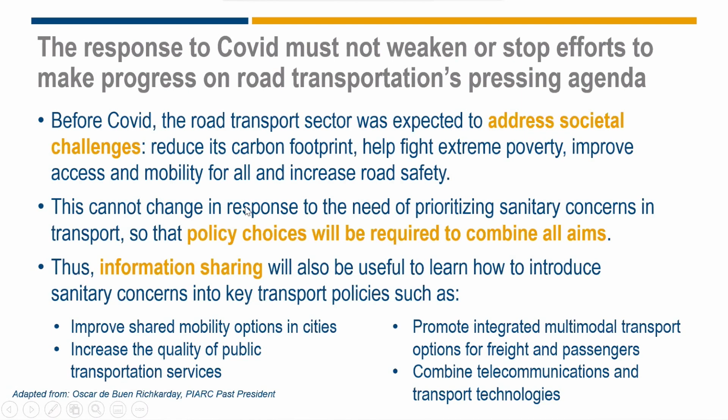So we need to combine all these aims. And for that, there's one way that we can help at PIARC and with Asociación Argentina de Carreteras, through information sharing, so that you can learn in Argentina what we are doing in many other countries, and vice versa. We can learn what you are doing in Argentina and learn from your ideas and your best practice.

And we have two very important conferences, and I guess the first one will be very important for you. The 9th SURF Conference, SURF 2022, which will take place in Italy, in Milano, in September 2022, 1 year from now, and hopefully face-to-face.

So Argentina and PIARC, we have a very long history. Argentina was one of the very first countries to join the association in 1911. We have a vice president of the association who is from Argentina, and we have several key people who are secretaries of our committees, Lodi, Mariano Barone, and Daniel Russomano, of course, and many experts from your country.

So thank you very much from the bottom of my heart for your involvement in the activities, and I hope that in Argentina you find that really useful. And I will remember the executive committee meeting that we organized in 2019, that you organized in Argentina, in Buenos Aires in 2019. Really good memories for everyone.

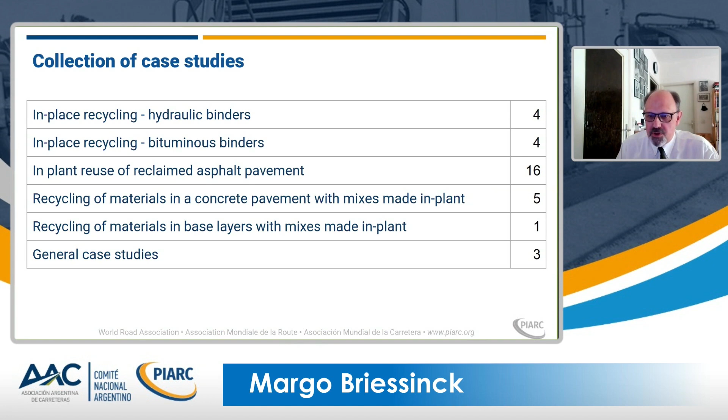So here we have the same layout, let's say. We have, again, the different chapters about in-place recycling and in-plant recycling, again, using either hydraulic binders or bituminous binders. In the right-hand column, you see the number of case studies for each chapter. It's probably not surprising that asphalt pavement is at the top, because it's, of course, a material which has been used for several decades now. So there's a lot of information there about reusing reclaimed asphalt pavement in asphalt layers.

There's also at the bottom a general chapter with 3 case studies. And in that chapter, you will find some of the cases which don't really fit into those other chapters. So in total, 33 case studies, which you can read in the collection after it has been published. So that's what I wanted to say to you today.

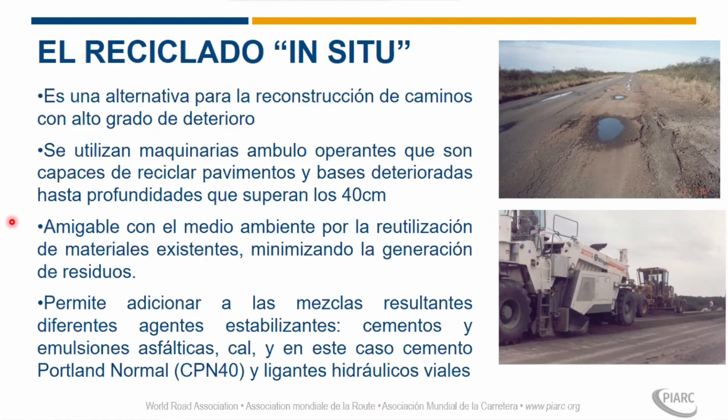In-place recycling is an alternative for the reconstruction of our roads with great deterioration. In general, we use self-propelled machines that can recycle pavements and deteriorated bases over 40 centimeters. It is an environmentally friendly technique with the reuse of existing materials, and what we try to do is to minimize waste generation. We can also add to the resulting mixes different stabilizing agents such as cement or asphalt emulsion. So we have, in this case, used Portland cement or specific hydraulic binders.

Which are the opportunities to recycle? It is important to recycle when the structural capacity of the pavement is not adequate for the current and future traffic, when it is necessary to do a quick recovery or reclaiming of the use of the road, and when the existing pavement condition requires deep patching over 15 to 20% of the surface. So it's a profitable technique. So this is the in-place recycling technique.

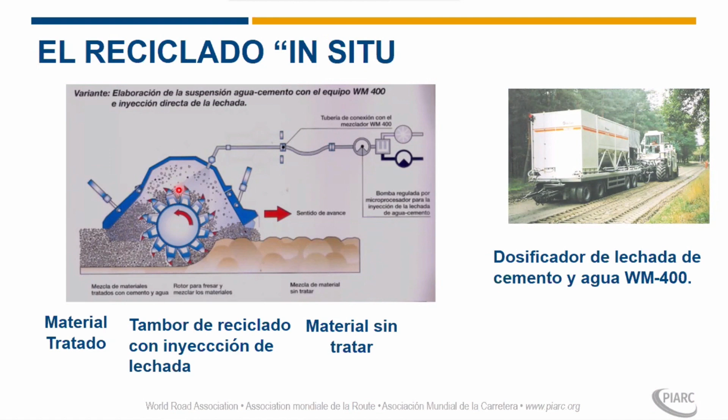We put the material in the front of the machine with recycling drums and moisturizing within the recycling. We have water tanks that go at the front of the machine, and then we can also use a technique by which, instead of moisturizing, we use cement slurry within the drum, and we place the mix there, to be distributed and compacted at the back of the machine.

So factors affecting design and construction: some of them are the immediate commissioning of the rehabilitated area, if it's not possible to use alternative roads; sometimes there's no possibility to use any other alternative roads. Another factor is the need to have a quick recovery of the structural capacity in terms of the structural number required by the road, and also mitigate the environmental impact by minimizing the generation of noise, dust, or waste when working in urban and semi-urban areas.

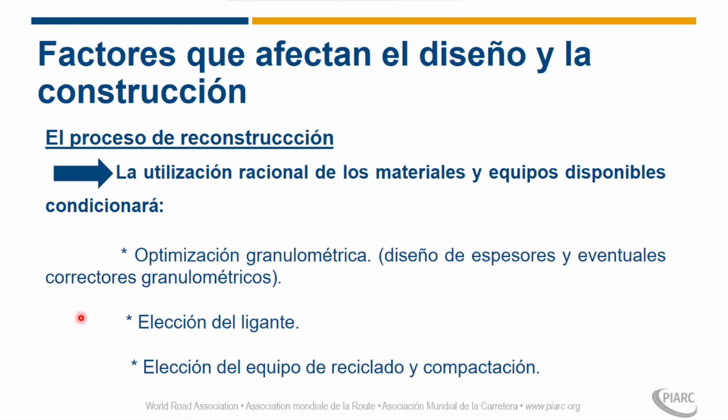As to the reconstruction process, what is important is the rational use of materials and available equipment. This rational use will condition the granulometric optimization. This means that we must design thickness and eventual granulometric correctors with new materials. This is not advisable from the economic or environmental point of view. Then we need to choose the binder. And finally, we need to choose which is going to be the recycling and compacting machine or equipment.

So what we are going to present here is some of the lab studies that were used for this case study. First of all, we show in this table to the left, in the first column, the existing structure and the actual pavement. It had an asphalt overlay over a black base, then a calcareous base, a calcareous subbase. This was a base of selected soils, and finally we had the common soil subgrade. To the right, we can see some of the situations found there.

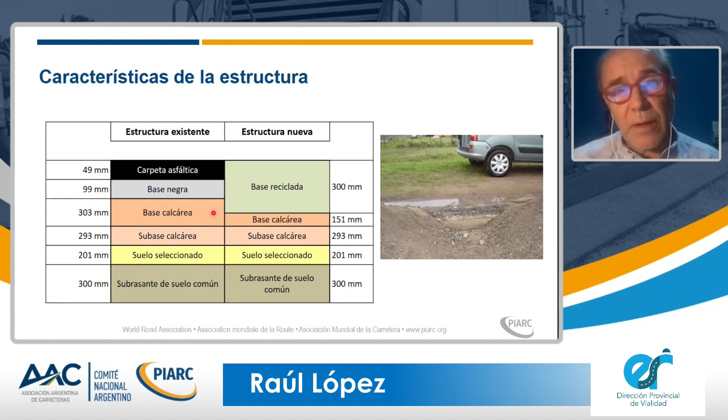And we did a study to assess the depth to be recycled, and the recycled depth was 30 centimeters and included the asphalt base, the black base, and the calcareous base. And why did we choose that depth? This was related with what Engineer Bolla said about granulometric use.

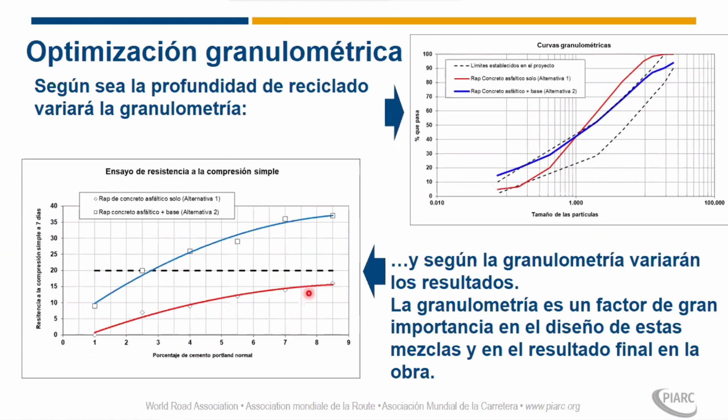On the graph to the bottom left, we can see resilience at 7 days obtained with the two granulometric settings, changing the percentages. Here we have the first test with normal Portland cement, and if we could not meet the granulometric parameters, even with high cement percentage, we could not get to those numbers.

Once we selected the granulometric setting, we decided to work on the one hand by using normal Portland cement according to the Argentine cement standard, which is IRAM 50,000. And the other options were road hydraulic binders that were tailor-made to be used with the RAP, with the reclaimed pavement. And these components are regulated by the European standard 13282, parts 1 and 2.

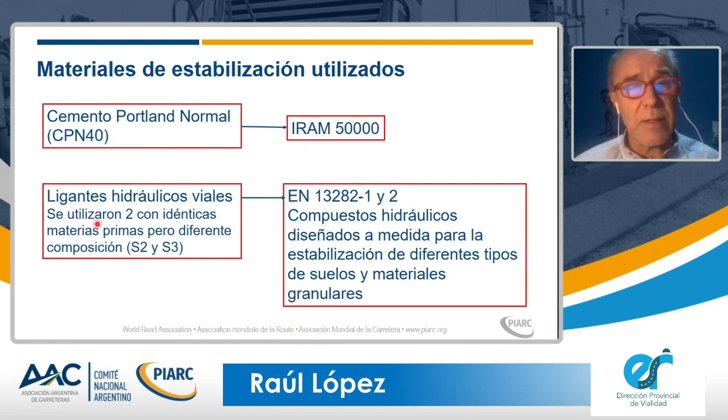In this case, we used two road binders that had the same raw materials but in different proportions in order to obtain different behaviors. Binders used in this job are formulated from active hydraulic components, and they will cement the recycled mix. And the properties we are looking for here, compared to a cement, is to reduce the initial reactivity in order to obtain longer available working times, to develop long-term strength, and to have good volumetric stability. And something that is important nowadays is that they have a lower carbon footprint compared to cement.

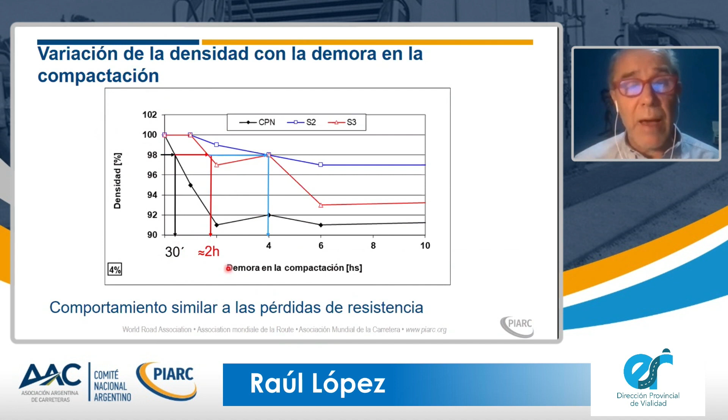Another analysis conducted was considering the open time definition. That is the time you have available for working while the drop in density is just 2%. It means to go from 100% to 98% of density. So with cement, we had an open time of only 30 minutes. And with the binders, we can get up to 2 or 4 hours, depending on the composition of the material. So this was also seen later on in terms of strength.

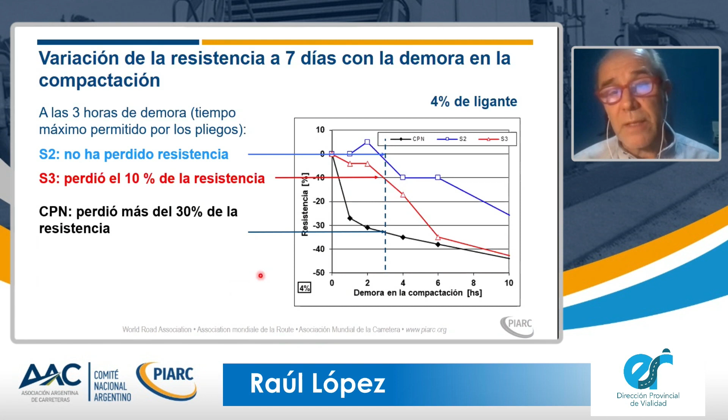But we also were able to see that as we increased the percentage of binder, the percentage drop in strength was higher. So in order to define the type and percentage of binder to be used in stabilization, it is convenient to do lab tests simulating the estimated delays in the work between the mixing of the materials and compacting.

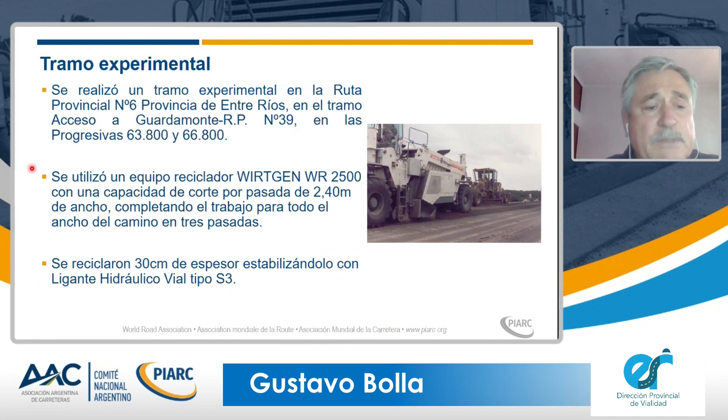Gustavo? So finally, we will present a field study done in the province of Entre Rios on provincial route number 6. It's a stretch of 3 kilometers on the route in the province of Entre Rios. We used WR 2500 equipment, and we used 3 passes to complete the job. We recycled 30 centimeters of thickness, with stabilization with S3 binder. We projected minimum compression strengths at 7 days of 2.0 MPa by using an S3 binder at 3.5% of dry mix weight, compacted at maximum density.

Here we don't have the possibility of alternative roads, so we opened the road once again at 24 hours, just doing irrigation. We did priming with EM1 emulsion, reinforced with crushing sand. Then at 9 months, we did a 5 centimeter layer. At 13, a second 5 centimeter layer, and at 40 months, we conducted the first reinforcement with another 5 centimeter overlay, and at 6 years, a 5 centimeter asphalt overlay. This alternative was defined taking into account the economic conditions at the time.

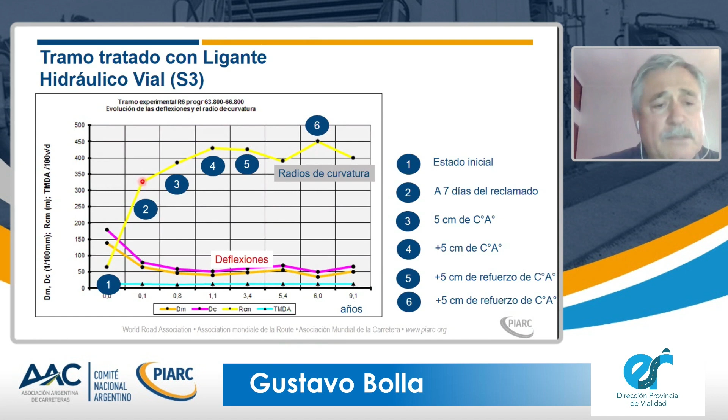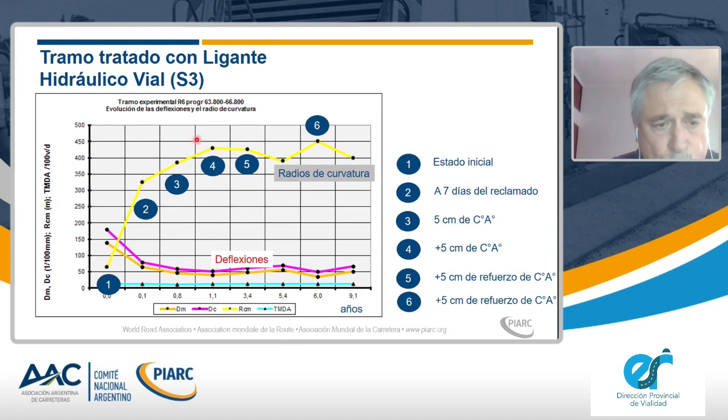So here we can see the evolution of these works. Originally, it had very low curvature radii and high deflections, as we can see in point 1. This was the time before the reconstruction of the recycled base. Point 2 is once we recycled the base, and we can see a quick recovery of the structural capacity of the road, with a great increase of the curvature radius and deflections reduced to reasonable values. Then, considering the AADT that you can see on the light blue line, consistent between 1,200 and 1,400 vehicles, we can see that as we reinforced the road, the structural capacity of the road stayed quite good. Then, next.

Finally, some conclusions. Cold recycling with hydraulic binders enables a quick and economical recovery of the structural capacity. Some delays in compacting would affect the final quality, but may be counteracted with the use of a specific binder and adequate proportions. Granulometry of the material is a key factor for the final result. The quantity and type of binder may not be enough to reach the project strength, and the selection and dosage of the binder may enable greater control of reflection cracks. We had that occurrence with the use of the proper binder.

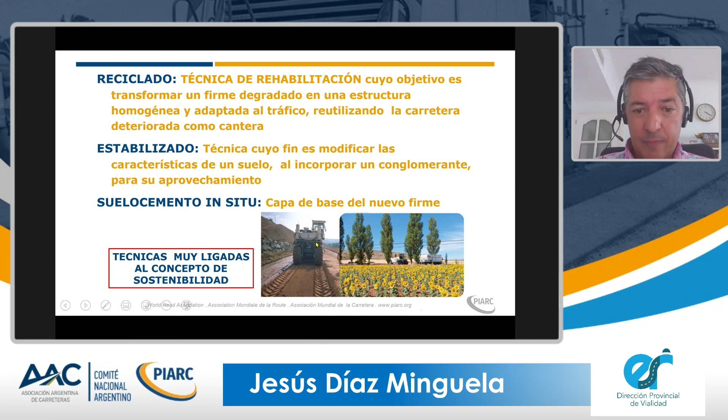Stabilization is existing soil, and the on-site technique is with a base layer. You have to take into account homogeneity, for example, the emulsion. This depends on the thickness of the layer. In recycling, you go to 10 or 12 centimeters, and the other techniques enable you to go to 20 centimeters.

It is not done more because of problems with the base. And regarding cracks and breaks, there's a need to deal with water, and this translates into more durability.

These are environmental advantages because the quarry is the road itself. There's no transportation, so there's fewer emissions and fewer collateral impacts to other roads. It's a cold technique, there's little emissions, and it has economical advantages regarding cost because there's no transportation costs and there's high yield. It's better for cost-benefit effects because there's no need for a plant.

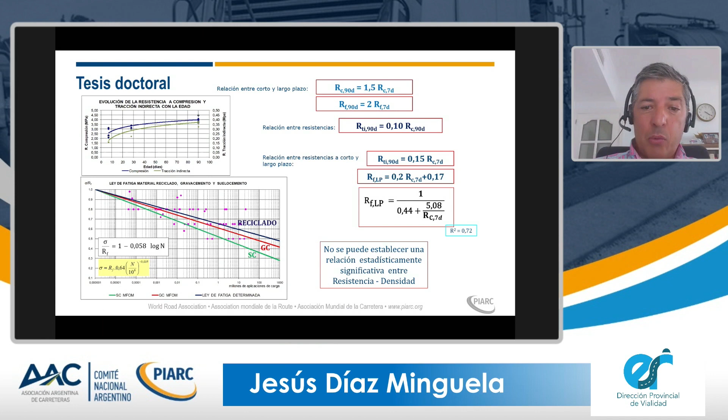It's 1 minus 0.058. And here you have the French standard. Recycled material has been studied at the University of Burgos in Spain.

The resistance, or the resilience, for the short term is what you measure when you're doing the work, and the long term is measured when you control all the calculations. And this leads to this doctoral thesis, which shows a model of behavior and response, giving you the next calculation.

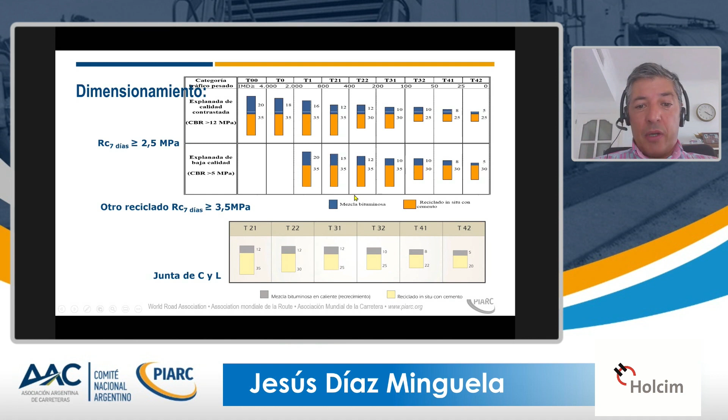For 7 days it's more than 2.5 MPa, and for other recycling, it's more than 3.5 MPa. And when you mix with cement, this is published in the norm with recycled bituminous mix, and it gets to 35 centimeters. There's only one change: in my calculations, instead of 12, I used 10.30.

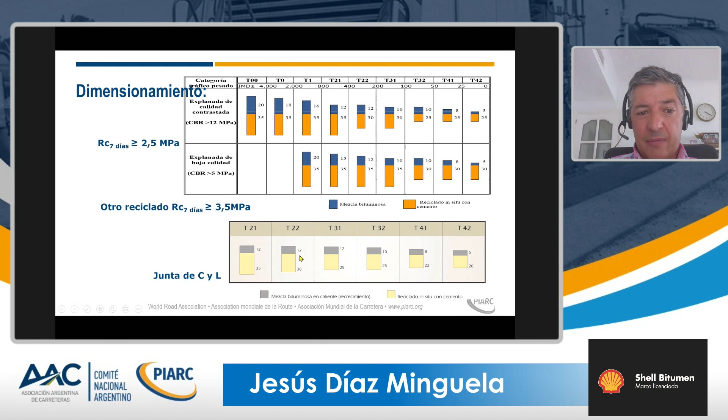And really, you cannot touch this layer when you're recycling. There are two points that I want to highlight when I talk about workability: the standard 13286-45, which is for Europe and Spain, and this one.

It's the IPI, or immediate bearing index. I was getting confused with the name, but it's this index that I take into account for these two tests.

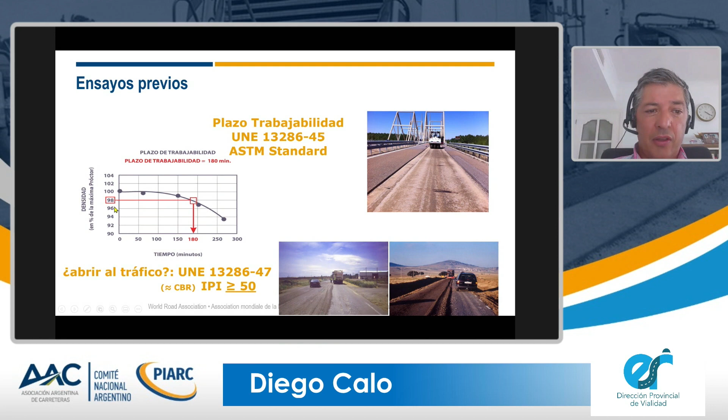The norm 13286-45, where we take into account the quantity of material, which adds 2 points of density, and then you can calculate the time in minutes. You can see the graph with the test where we measured this.

And then when you open it to traffic, based on UNE 13286-47, the IPI is more than 50.

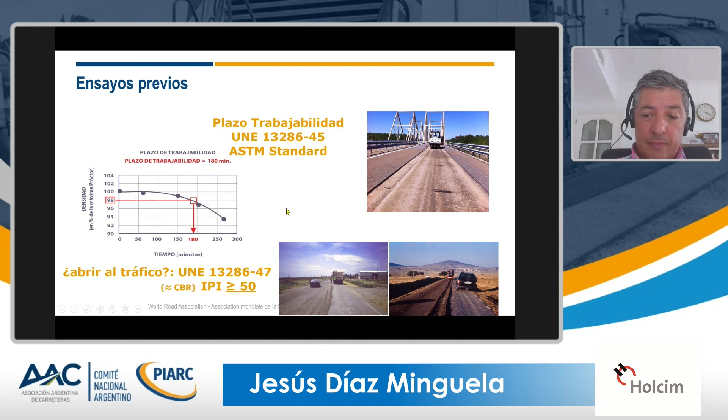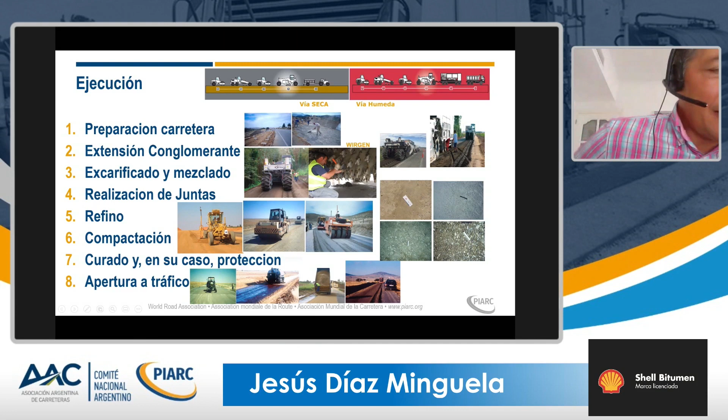Mixing, joints, refining, compaction, curing. Here you have pictures of each of these. Refining, for example, here. Refining and compacting, and then curing.

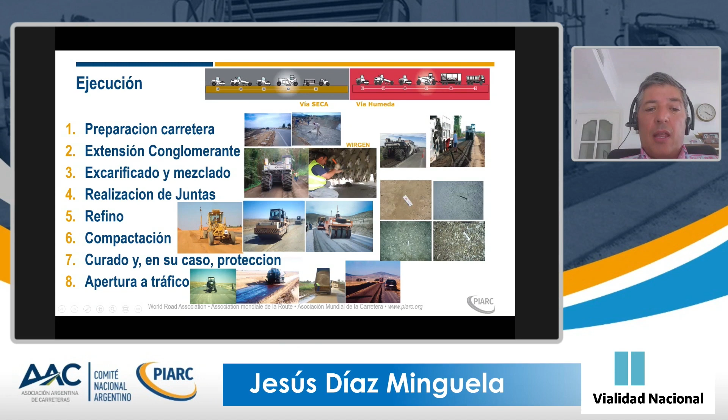You have to be careful to use water at the right time, because the main problem is that when you cure with water, with the bitumen truck, with the emulsion, the one you use normally comes later, after recycling. That is done, for example, at noon and at the end of the afternoon.

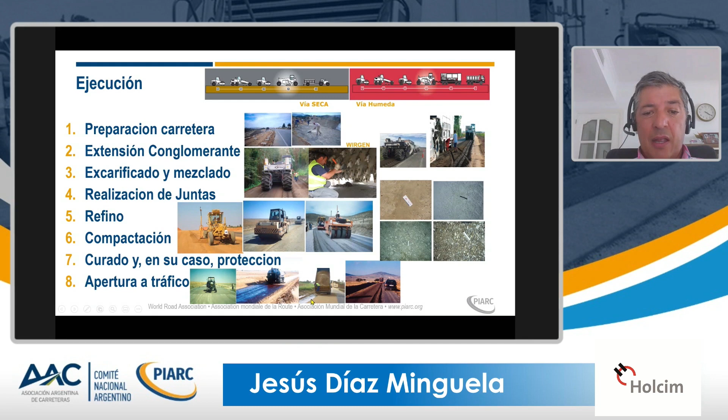So if it is necessary to open it to traffic, you have to extend this. If not, you need to introduce a detour before you leave it some time before opening it to traffic. I think you have to be very careful in densifying, curing, and binding the layers.

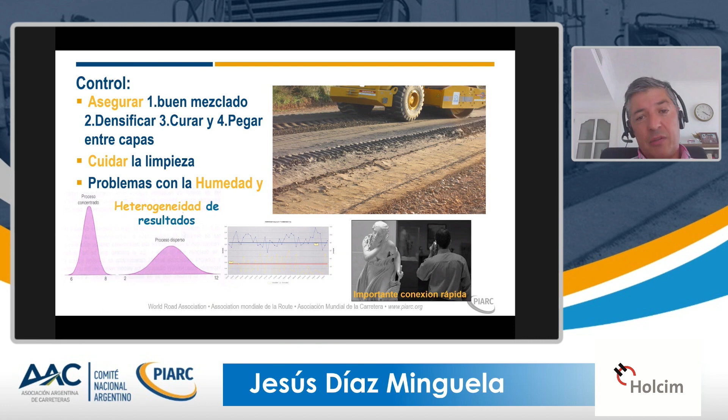You have to be careful there. You have to be careful about cleaning. And this is a recycling where you need to be careful in execution, particularly because there are changes. This used to be a straight stretch, but now the existing layer differs from the previous one, and it modifies at the curves. You need to be careful about homogeneity versus heterogeneity.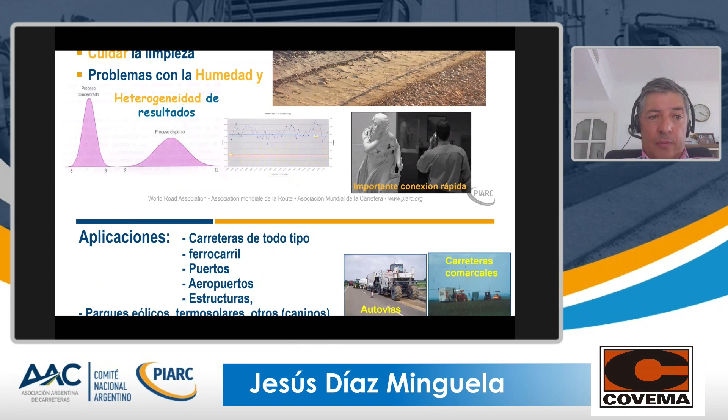Here we show the dispersion process of heterogeneity in the results. And here, what I want to show is the connection between the foreman at the work, who's in charge of the work in Spain. They need to do many things, so it's not the right person to trust with the results. For example, regarding density, you have to talk to someone on site to tell them they need to get the information and modify compacting.

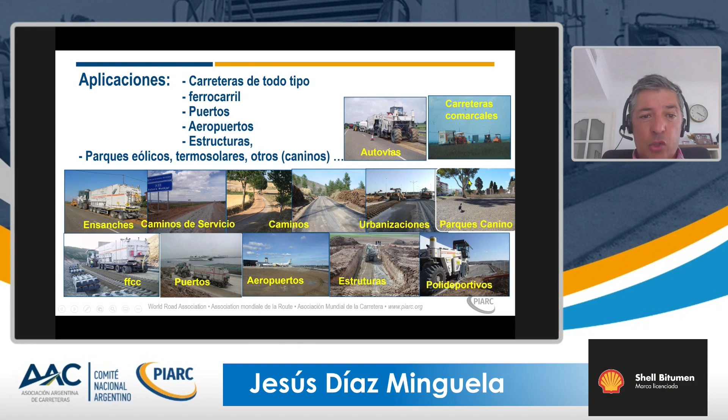Applications, well, it could be for railroads, harbors, airports, wind parks. These roads, for example, you see a park where in Spain we are used to stabilizing everything. Wind fields, and this park, we didn't know how much cement we needed to use, but we needed something to protect the legs of dogs in the park, but be able to provide protection for dog waste.

In Castilla y León, this is an autonomous community that has been doing this since 1999, and there's light traffic where you have 4 centimeters of bituminous mix and then rocks or stone. Sometimes it's 3 centimeters instead of 5. There's a wide variation, but there's 4 centimeters of bituminous mix and 30 centimeters of cement recycling.

There's no granulometric correction, and there are variations between 32.5 for CEM IV. There are different types of cement in Spain, almost 200 types. So you need to choose the most adequate cement for each use, depending on whether it is a wind park, a road, or other uses.

So you need to study granulometric and plasticity, the optimum parameters are variable, and then you define resistance. It can be WM400 or the leveling machines, the rolls in a tandem for compacting.

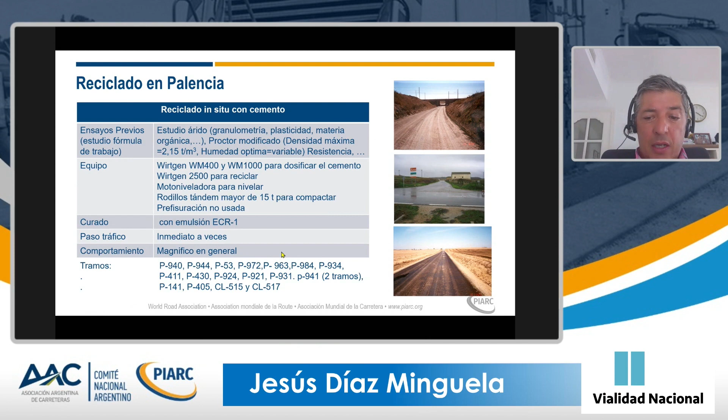And this is what you see in Palencia, because you have a plateau. Then it's cured with water, and it can be opened to traffic immediately. The behavior has been great in general for more than 22 years. Here you can see pictures on a rainy day even.

And then another recycling in the highway A231 in León, Burgos. It's 55 kilometers that were recycled and 26 kilometers with cement on site. This is one 3-meter wide that was recycled with 4 centimeters of BBTM for the whole layer, 12 centimeters of bituminous mix, and 31 centimeters of recycled on site with cement, 25 SC plus 6 MB.

There were 25 centimeters plus 6 of bituminous mix, as I said, and the granulometric corrector was not used. In the previous study, I talked to you about granulometric, and the modified aspect is

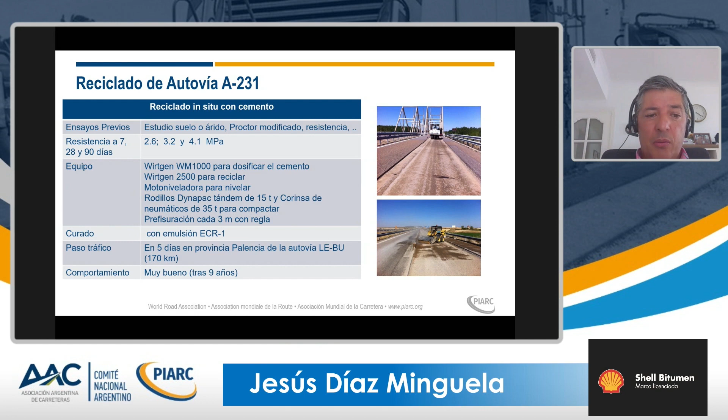resistance or strength. And here you have the equipment, the Wirtgen WM1000 and the 2500 for recycling, the leveling machine, and rolls with a ruler. And it's interesting to do curing with emulsion ECR1, and it was open to traffic in 5 days with very good behavior.

You have recycling stretches here in the highway. This is used for recovery of the soil when there's failure. Here you can see the sequences and the photos showing the recycling with the equipment. This is the Wirtgen 2500, the VM,

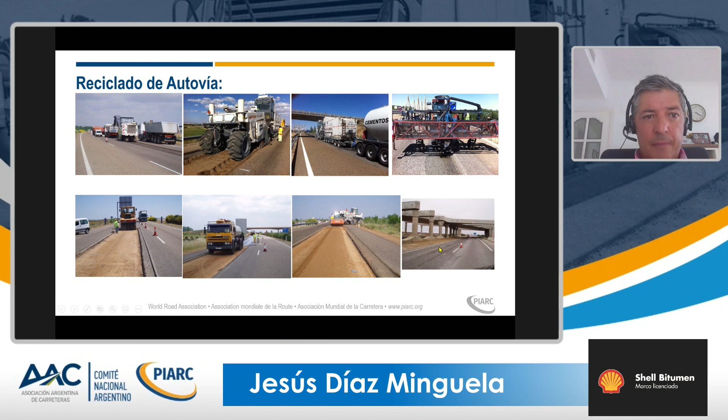Let me talk about a few conclusion works. There's a phrase from Seneca who said, sometimes we don't dare do things because they look difficult, but in fact it is more difficult when we don't dare do them.

Einstein said, if you look for different results, you cannot do the same thing all the time. And then Quixote said, no science, if it is a science, cannot deceive us.

Then you have to take into account draining and the contractors. Sometimes the contractors do things that you're not expecting.

If you go to www.ieca.es, you are going to find more information about recycling and many other technical guidelines. Thank you very much, and that's it for my presentation. I hope I did okay with time, and gave you some information about recycling, so I give the floor back to you guys.

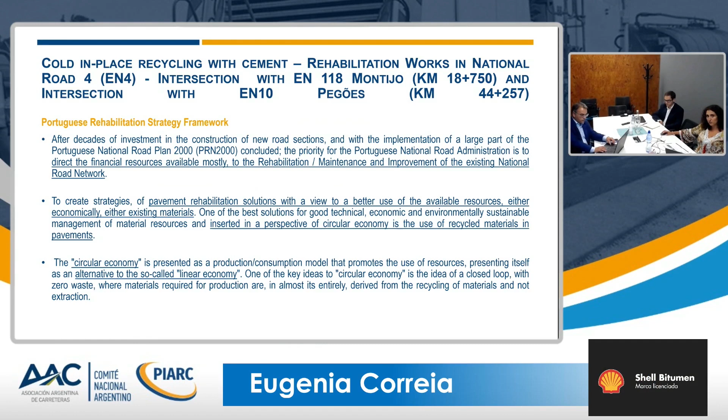Our case is a national road with 25.5 kilometers that we had to rehabilitate. The recommended strategy for this project was to study solutions with a high rate of reuse of existing materials and at the same time guarantee a lower cost for intervention.

In this case study, the technical, economic, and environmental advantages and disadvantages were evaluated by implementing the in-place recycling solution versus a traditional solution, which is removing the pavement and constructing a new structure. We will also focus on the importance of laboratory control for the success of the solution.

This is the location of the road. We have a cross-section profile type 1x2, a lane of 7 meters wide, shoulders of variable width, 0.5 to 1 meter, with or without paving structure.

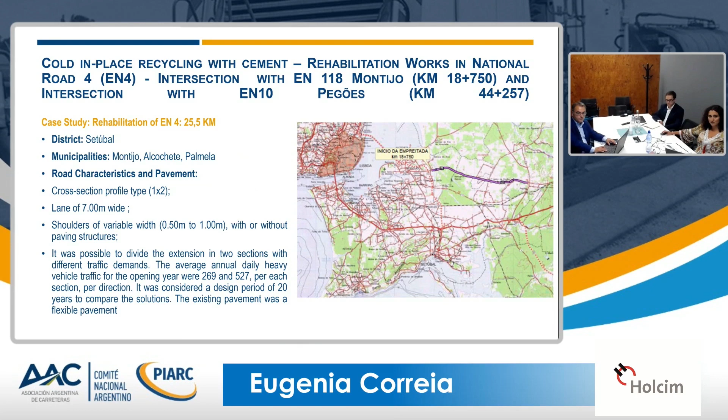It was possible to divide the extension in two sections with different traffic demands. The average annual daily heavy vehicle traffic for the opening year were 269 and 527 per each section per direction. We considered a design period of 20 years to compare the solutions, and the existing pavement was a flexible pavement. This is the cross-section profile.

So how do we do these cases? We start by doing preliminary investigations. This is very important when you go for a recycling solution. So what did we do? We consulted our pavement management system. We conducted a falling weight deflectometry campaign to assess the stiffness deflection.

And we conducted an IRI campaign. It was made an extensive visual inspection to detect and classify the existing pathologies. We also conducted some field work where we extracted 23 cores and executed 13 test pits. The collected material was characterized in laboratory.

For the granular materials and subgrade soil, we did the granulometric analysis, Atterberg consistency limits, sand equivalent, heavy compactation with a modified Proctor. We determined the bearing capacity ratio of the soil. And for the bituminous mixtures extracted, we conducted some bitumen penetration at 25 centigrade tests.

Bitumen softening temperature by ring and ball method. We determined the maximum theoretical density of the bituminous mixtures by the pycnometer method. We determined the percentage of bitumen of the various bituminous mixtures, and we also determined the apparent density of the bituminous mixtures and did the granulometric analysis of the aggregate in these mixtures.

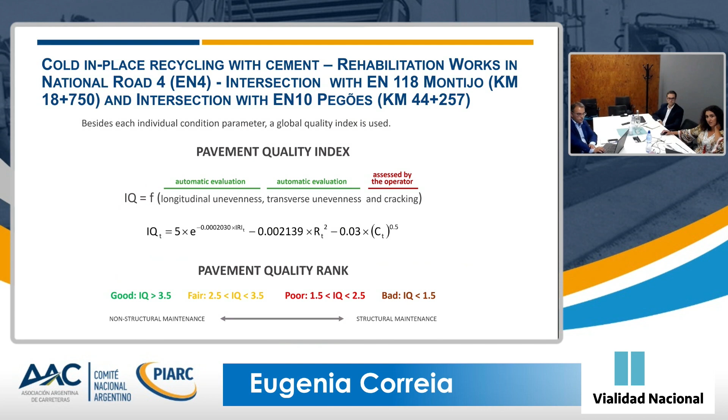So what did we do as a road infrastructure manager? We have to know how much this will cost us and how much waste we will produce, and what is the more interesting solution for us in terms of complexity and construction methods. So we have assessed two solutions.

One solution of reconstructing a new pavement, and another solution of doing full depth reclamation of the existing materials with the use of a hydraulic binder. Why a hydraulic binder? Because we had a very low structural capacity, we had very heavy traffic, and the materials from the preliminary investigations told us that this would be the best solution.

And for the circular economy model it was the full depth reclamation of 30 centimeters, and then a binder layer and a wearing course layer with a total of 8 centimeters of bituminous layers. So it was defined as a design criteria what were the parameters that this project should have.

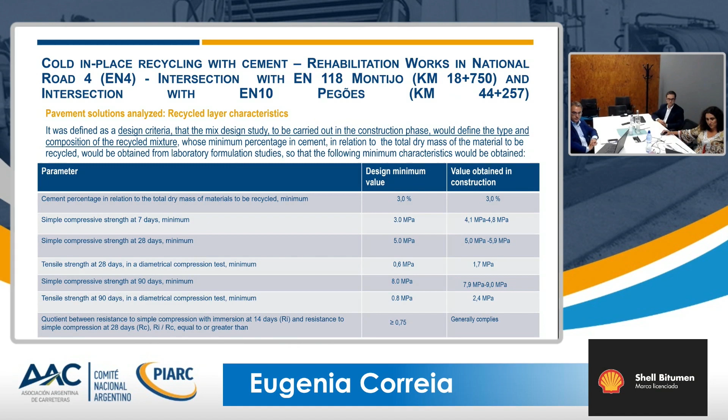So for design, the mixture after compacting should reach a modulus greater than 3,000 megapascals at 28 days and 5,000 megapascals at 90 days, determined in place through load tests with impact deflectometer for the first trial section. The design value for us to determine the bearing capacity, and to do our calculations, was 5,000 megapascals. So we used the software BISAR 3.0. This is the stabilized layer expression. And for the constant for the material, we used 0.07.

One of the concerns when recommending mixtures with high rigidity, as the recycled mixture with cement, with the combined effect of the temperature variations and the traffic actions, is the appearance of cracking by thermal retraction. In order to avoid it, we defined in the construction specifications the execution of a transverse pre-cracking. And our binder layer was recommended to have special flexibility characteristics to avoid the propagation of cracks to the wearing course. For that, we used a rough bituminous mixture with rubber modified bitumen. Now I will pass my presentation to Pedro, who will explain the construction and the conclusions of this project.

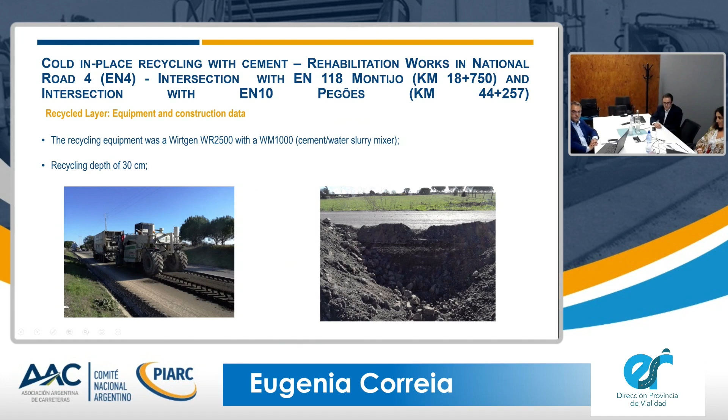We'll talk about the construction aspects of these works. The recycling equipment was a Wirtgen WR 2500 with a WM 1000 to do the cement water slurry mix, as we already saw. The recycling depth was about 30 centimeters. In these photos, we can see the equipment and the cross recycled structure. The minimum cement content by mass was 3% and in situ density above 97%. There are some photos of the works.

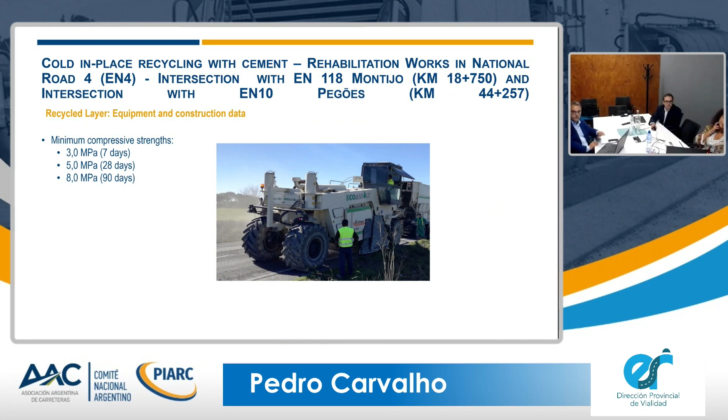And for the recycled layer, we have to obtain these values. As Eugénia already said, minimum compressive strength of 3 megapascals at 7 days, 5 and 8 at 28 and 90 days respectively. So, related to quality control of the recycled layer, some of the aspects related to the execution of the recycled layer are the working formula, stabilization, working time, and thermal retraction cracking.

One of the most worrying aspects was the variability of thickness found in the pavement. The shoulders are very thin, the center was very, very thick, which made it difficult to determine the working formula, requiring in certain areas a previous milling of bituminous mixtures that were not incorporated into the recycled layer. With this milling, it was possible to create a single formula because we reduced the percentages of the bituminous layers and the hydraulic binding was more effective, with the percentage of cement in the formulation of the mixture pointing to the minimum value defined in the project, the 3%.

The trial section was performed on the left road in November 2017, attesting to the formulation of the mixture prepared in the laboratory, and the following data were verified. Simple compressive strength at 7 days in the order of 4.1 to 4.8. At 14 days and 28 days, we reached the value stipulated in the project. It was a successful trial section, we can say.

In the first days of production, with the milling we thought was necessary, and it was, the results were even better than we obtained in the trial section. These results were reflected in our parameters at 7 days and 14 days. In most situations, resistance gain occurs in the first days up to 7 days. And at the end, at 14 days and 28 days, the values point to values closer to those stipulated in the project.

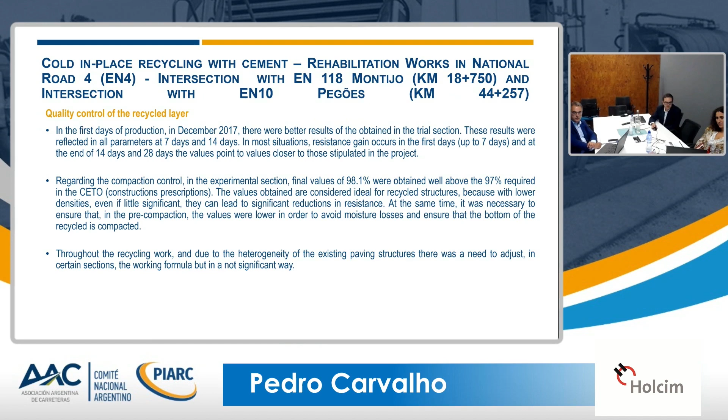Finally, it is added that the curing time of the recycled layer was quite variable over the several months of work and never reached the theoretical time defined in the project, the 7 days, which required reformulations to the planning of the works. In conclusion, the decision in the design phase to follow a circular economy model needs validation after its implementation, because in addition to the advantages exposed through this case study and all existing documentation on this subject, the need to evaluate the two solutions in the design phase is urgent in the economic, environmental, and technical aspects, considering the implications of implementing the recycling solution.

The following table highlights the aspects considered most important in the decision making in the design phase. You can see the linear economy solution versus the circular economy solution. Related to costs, there is a huge difference because of the new bituminous mixture, which is very expensive. For milling and removal, we have more quantities in the linear economy solution versus the circular economy solution, and of course, the percentage of reused materials in the linear solution is 0, and in the circular economy solution we have obtained 74% of reused materials.

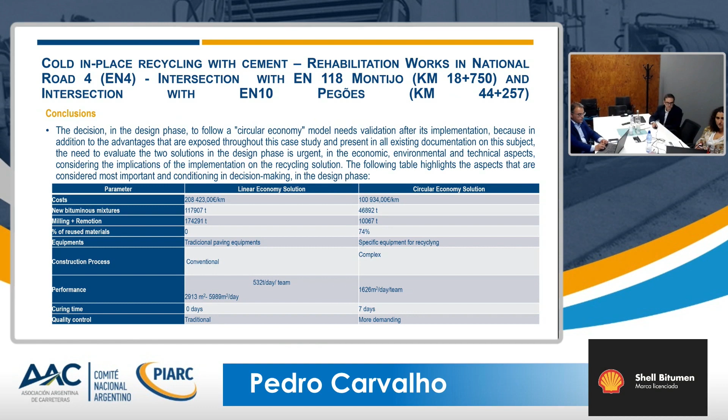Concluding, the main aspects considered in the decision-making in the design phase when comparing both solutions show that the use of recycled materials was the most economical rehabilitation solution. It presented environmental advantages, which highlight the use of aged pavement materials, elimination and reduction of waste products, reduction of energy consumption, and reduction of emission of harmful gases. It has more specific technical requirements and more demanding construction methods than others.

With good performance. In conclusion, we can say that the circular economy model is better, but we have to look at the big picture. Sometimes we have to choose between the two solutions because of the traffic, because of the cross sections, and more aspects we have to consider in the design phase.

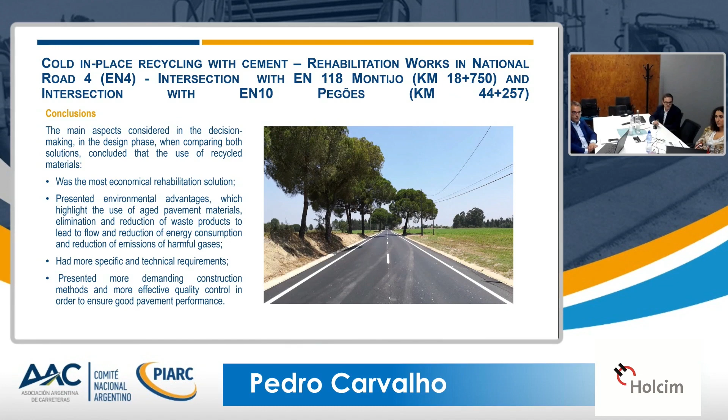So now we go into the second part of this panel. The conference will be the development and evolution of cold in-place recycling with cement in Uruguay. In this presentation, we will have Luis León and Nicolás Vaz.

Luis León is a civil engineer with a specialization in transport and communication roads. He is part of the National Road Administration of Uruguay, and he works in road project and design. And Nicolás Vaz is also a civil engineer with a specialization in transport and communication. He works as a project engineer in the road department, and he's an engineer in the construction division of the National Road Administration of Uruguay. So Luis and Nicolás, you have the floor. Thank you for being with us today.

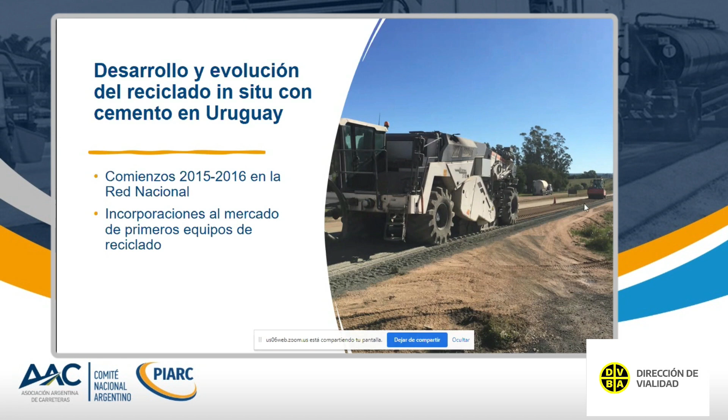As I was telling you before, we have started with the development of the recycling technique a short time ago using cement. The national road network comes from 2015, 2016, when we started working on the cement recycling technique. And this was the result of the acquisition of the first recycling equipment in the market. In Uruguay, the incorporation of this equipment came a little before starting applying the technique, and we tried to gain experience in different activities.

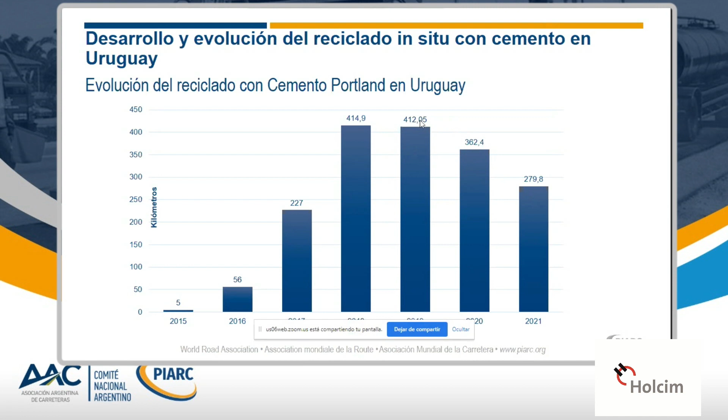As you can see, that was a quite quick evolution. We started in 2015 with just a few testing kilometers, and in 2016 the companies proposed to start using the technique, and the Ministry of Transport accepted and approved that. And as from 2017, the Transport Ministry started specifying cement recycling, and we have been able to keep a good number of kilometers given the extension of the country. We have approximately 1,700 kilometers being recycled with cement.

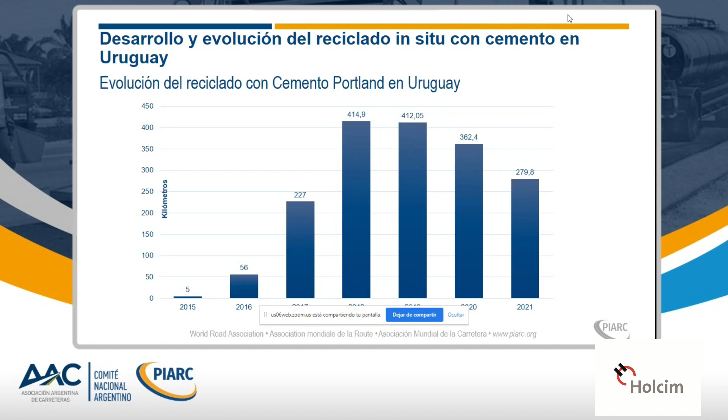And considering what Jesus said in the first presentation, to make a differentiation between recycling, which means using the material you have on the road, or in place stabilizing, something that is being implemented in Uruguay by using recycling equipment. So it's not easy to differentiate one from the other in the country. But recycling without contribution, using the material on the road, is approximately 20% of the network. We have already recycled 20% of the network with cement.

So the use of the material on site depends on different factors analyzed during the project stage. Maybe because we need to correct granulometry, or given the specific need to have more structural support. In Uruguay, forestry and cereal cargo have increased a lot in our road network, and this has been a great demand on the roads because of the cereals and lumber cargoes. So we have started recycling old roads, different overlays and surfaces, trying to provide a structure that would bear those loads. And this technique has been very well accepted.

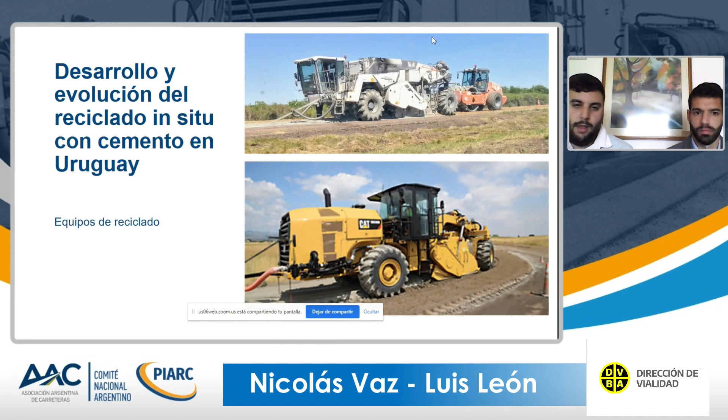Uruguayan companies have Wirtgen equipment. We also have CAT equipment and some Chinese equipment, but most companies have Wirtgen equipment. And as Jesus said before in his presentation, basically all of them have a 2.4-meter recycling drum, but there are some smaller equipment. Perhaps these have lower power, and perhaps there are some issues when trying to recycle over 25 centimeter thicknesses, but it's okay.

As for the cement distributor, in Uruguay at least, we know that slurry cement can be done wet, but in Uruguay all cement is managed dry. So we have the truck or a trailer that comes with the cement, and all companies use dry cement in Uruguay. These are very good equipment that provide a very homogeneous distribution of cement.

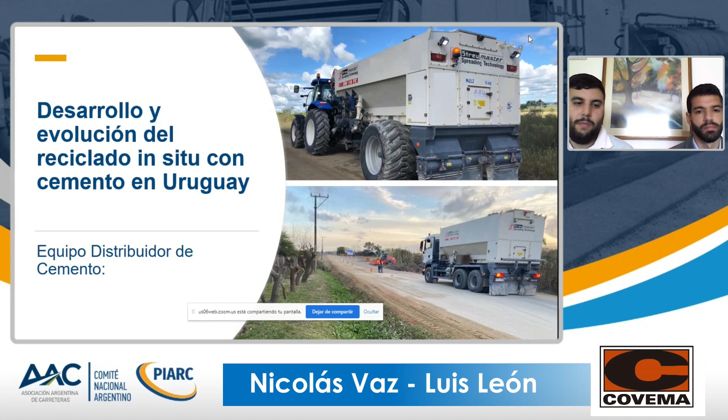And finally, what we have incorporated are automatic leveling equipment. Many companies have started using them, and they have reported very good performance of this equipment, and they have been very useful to correct certain issues.

And they have incorporated this type of equipment for recycling, and they have had very good results. So now I will give the floor to Luis to continue.

So Nicolás was commenting about the different specifications of the different equipment, and I'm going to talk about material specifications and the use of the technique. As Nicolás said, the first tests were done in 2015, and this is a technique that was not used before in Uruguay, so we tried to look for specifications from different countries that had more experience with this technique.

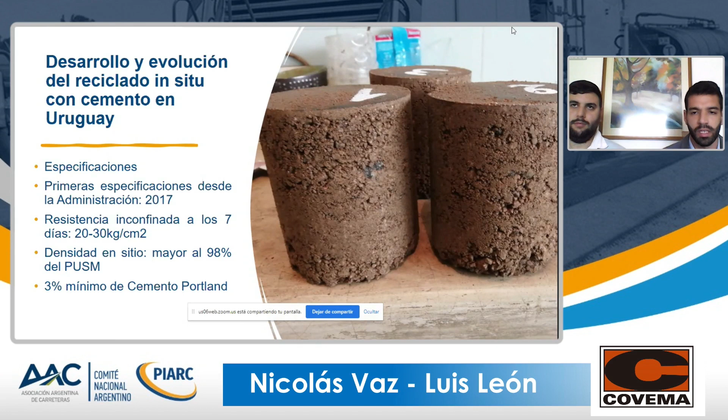So unconfined strength at 7 days between 20 to 30 kilograms per square centimeter, to prevent cracking that would come later because of the contraction of cement. In-place density over 98% according to the modified Proctor, and a minimum of 3% of Portland cement, of course. There's a formula where we have different test tubes with the different proportions of the materials to be recycled. And from there, we defined the quantity of cement to be included in the mixture.

After that, we started using transversal laps of at least 0.15 meters, 2 meters between days, and profiling and compacting jobs should not be done over 2 or 2.5 hours. Some requests for proposals stated 2, others 2.5 hours, and then we included curing.

At the beginning, we were not certain whether we should open for traffic immediately or not on this type of base. And clearly, it is very difficult to have the road closed for a long time, because in general, roads here are two-lane carriageway roads, so you need to be open for traffic as soon as possible. What was requested at the beginning is that the recycling equipment would not be away from the pavement, but since there were some issues with detachments caused by traffic, we included a curing through reinforced priming with emulsion and crushed dust. After that, we could open the road for traffic with no issues whatsoever.

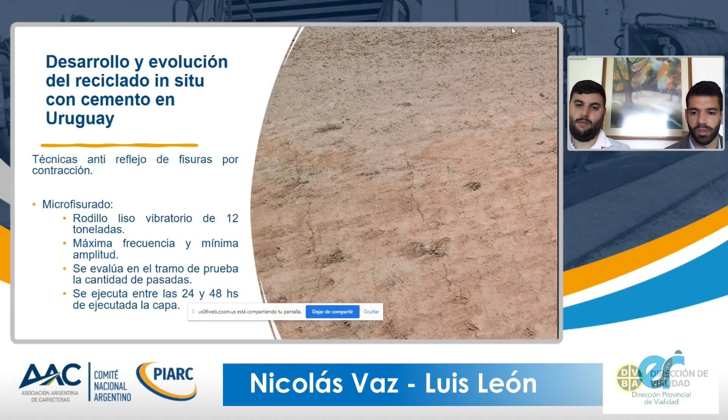On the other hand, we also have a company that has proposed a variation to this technique and started working on transverse joints. What they do is a cut every 3 to 4 meters, and they inject emulsion in those cuts before profiling.

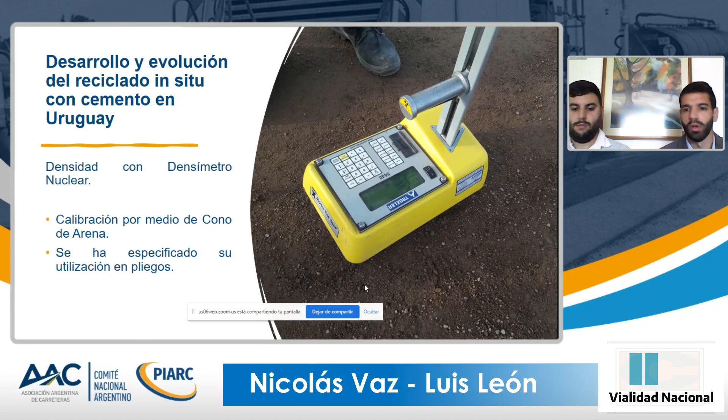And so Uruguay's experience with recycling has been very good, of course. We have had contraction cracks, but in general they have been controlled. At the beginning they are not sealed because of the look and feel of a new work, but if they are important, they are sealed.

And we also apply hard shoulder recycling. This is done with a milling machine, 15 centimeter thickness. Currently we have 70 kilometers of hard shoulder recycling with a very good experience, and there are 110 kilometers that are going to be recycled soon.

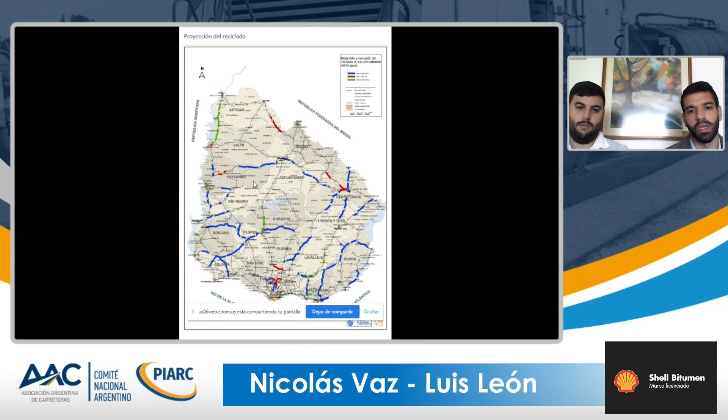So as Nicolás was saying, you can see in blue the recycling jobs that have already been finished. In red, what is going to be done during 2021. In green, you can see some stretches where the shoulders are going to be recycled also.

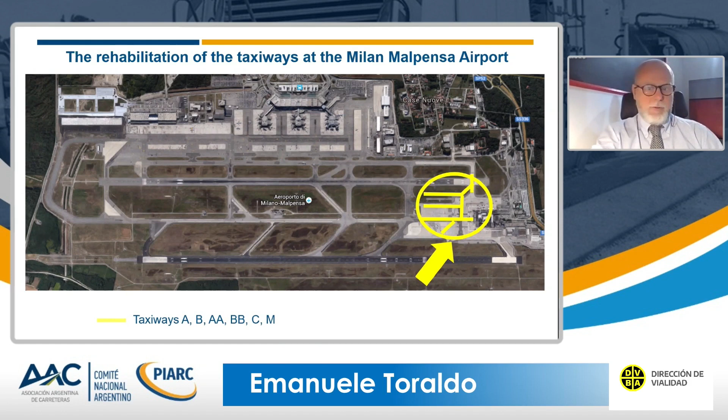The idea was to carry out a preliminary investigation in order to understand the current situation of each layer, the current bearing capacity of each layer, and then to decide the design of the pavement.

As a result of this preliminary investigation we identified two different areas, 1 and 2. In the first one, both slabs and the cement-treated subbase layer were affected by a lot of distresses, while in the second one, area 2, just the concrete slabs were at their end of life.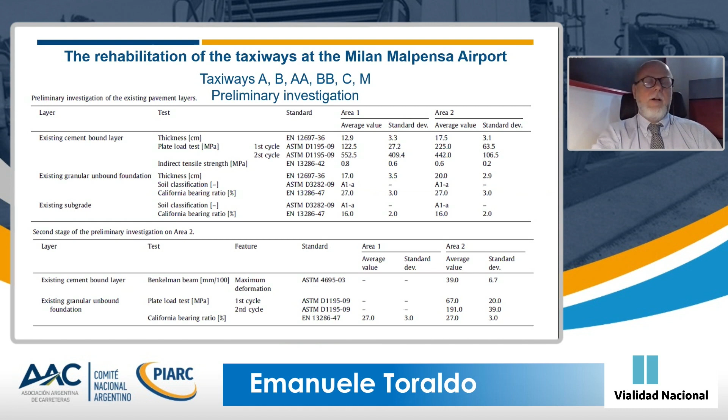The cement-treated subbase layer was in good condition and not milled. This table shows the results we found checking the preliminary investigation through both on-site and laboratory tests. It was very important to understand the condition of each layer composing the old pavement.

The point was that, using the information from the preliminary investigation, we were able to design two different kinds of pavements. The two pavements were different because in pavement 1, area 1, both the concrete slabs and subbase were removed.

We reused the crushed, milled material as aggregates for the new layers, in particular for recycling the cement-treated subbase layer. A cement stabilization of the existing soil was also carried out. The upper layer of this pavement was made of two different layers: an intermediate asphalt layer and a surface layer made of open-grade material filled with cement mortar, which I'll discuss later.

As for pavement 2, 29 centimeters of the existing pavement were removed, including the slabs, and the rehabilitation used recycled cement and bituminous emulsion treated material, reinforced by fibers. The aggregates for this layer were obtained by milling, crushing, and selecting the old concrete slabs, plus a surface layer and an intermediate layer.

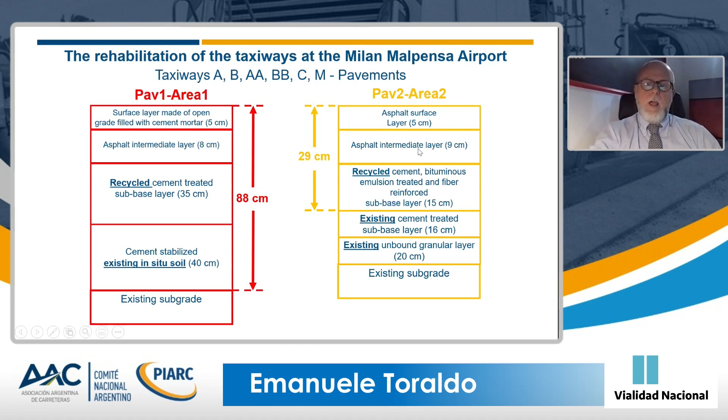These are some results of the key materials used for the reconstruction, and these are also the results we obtained during the mix design of the different layers for pavement 1 and pavement 2.

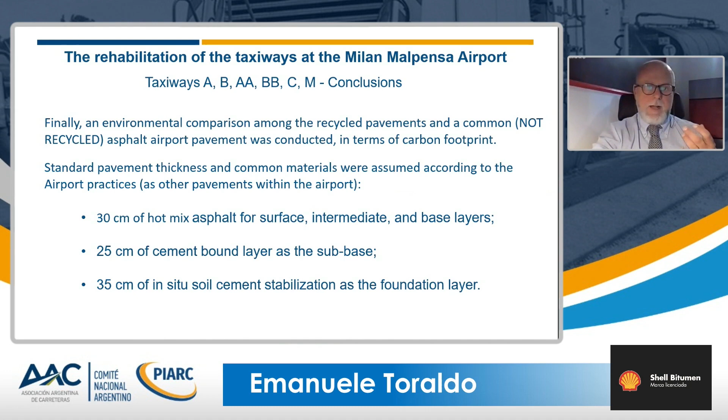For comparative purposes, the two solutions were compared from an environmental point of view with a standard pavement used in Italy for airport taxiways. The idea was to understand the environmental effect deriving from the use of this kind of technique.

As a conclusion of this environmental analysis, a total amount of 46,000 cubic meters of virgin aggregates were saved. In terms of CO2 equivalent emissions, 29% and 65% were saved for pavement 2 and pavement 1 respectively by using this kind of technique.

So you have a huge amount of environmental saving and also cost saving by using this kind of technique. The second rehabilitation case study concerns taxiways W and A.

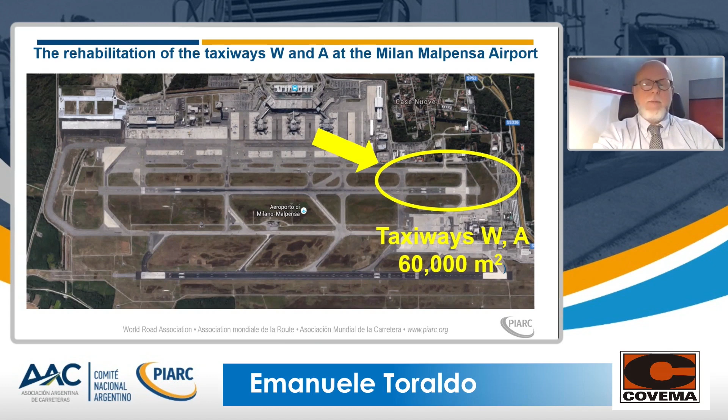It was necessary because the airport had to change its infrastructure for new large body aircraft such as the Airbus 380. Also in this case, the idea was to recycle the old concrete slabs as new material for constructing the new layer.

In this case, a total of 76 centimeters of pavement was rebuilt. The sub-base layer and the cement-bound base, 70 centimeters in total, were reconstructed using the old concrete slabs as aggregate. So we reused the materials removed from the old pavement in the same place.

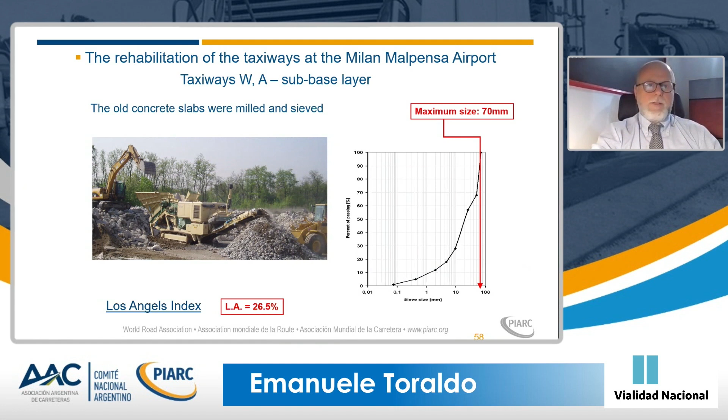Regarding the sub-base layer, going very fast, the old concrete slabs were milled, sieved, and selected in order to mix this recycled material with the in-situ material. And we had a lot of tests by using a test track in which we defined the type and content

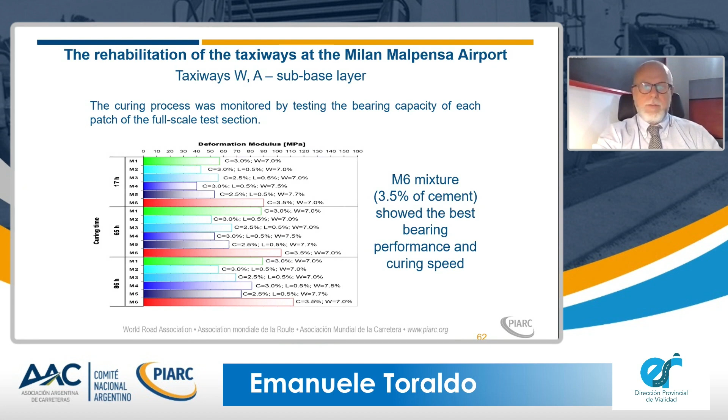of hydraulic binder we have to use for optimizing the performance of this kind of layers. And at the end of the analysis, the mixture containing 3.5% of cement showed the best bearing performance and curing speed of the layer. This is just the activities we had during the test track and also during the phase of construction.

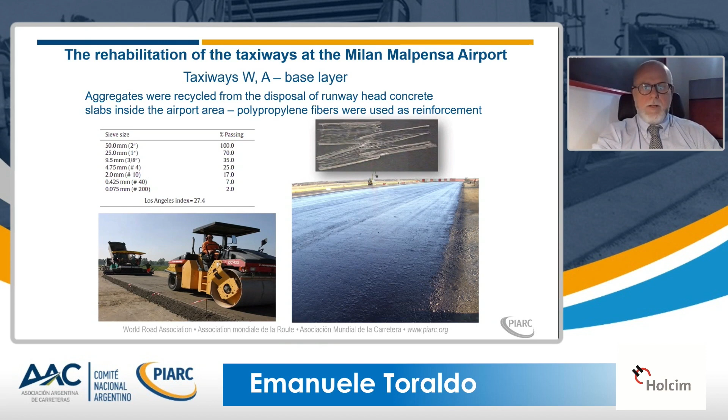Regarding the upper layer, the cement-bound base, the aggregate once again were obtained by the crushing and milling of the crushing and sieving of the old concrete slabs, and there were also use of fibers as a reinforcement of this layer.

It is a quite new solution, in particular when you use it for airport activities. The idea is to use a porous asphalt with 20% of voids, and to fill it by using a cement mortar. The idea is to combine the effects, the quality of the two different materials.